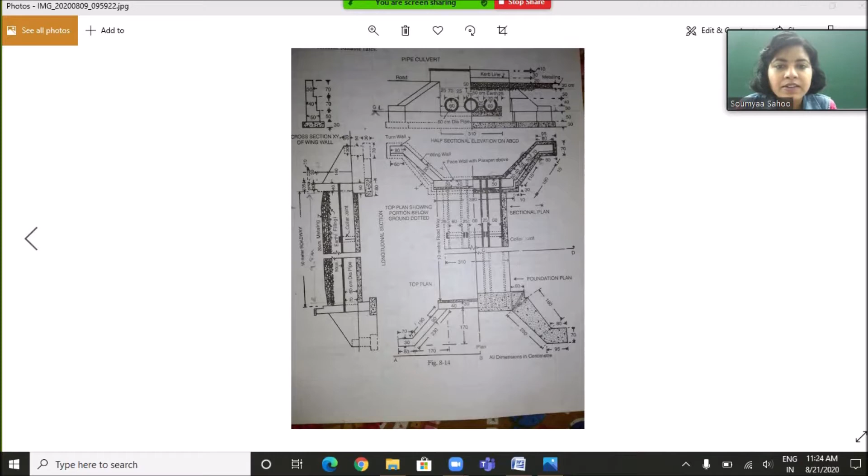So the first item of today's class is first class brickwork. Let's see the plan and the sectional elevation to find out where the brickwork is actually done. The brickwork will be done in the face wall portion, in the wing wall region, in the turn wall region, and of course in the parapet region and over it the coping region. So in these portions you have to do the brickwork.

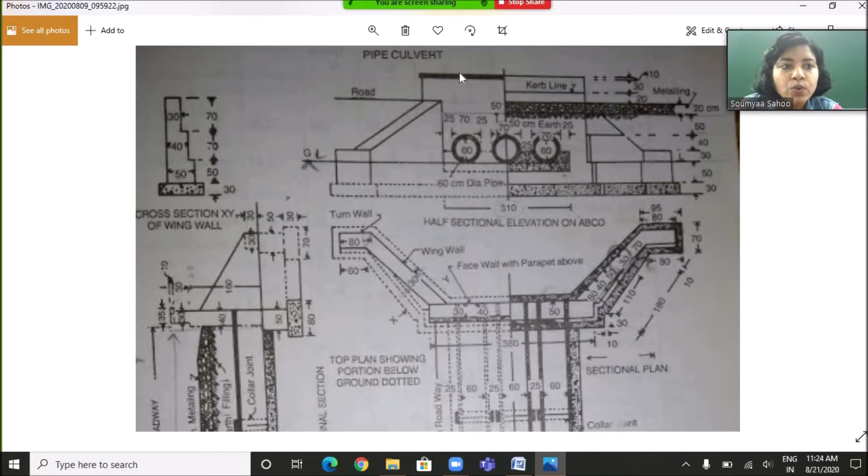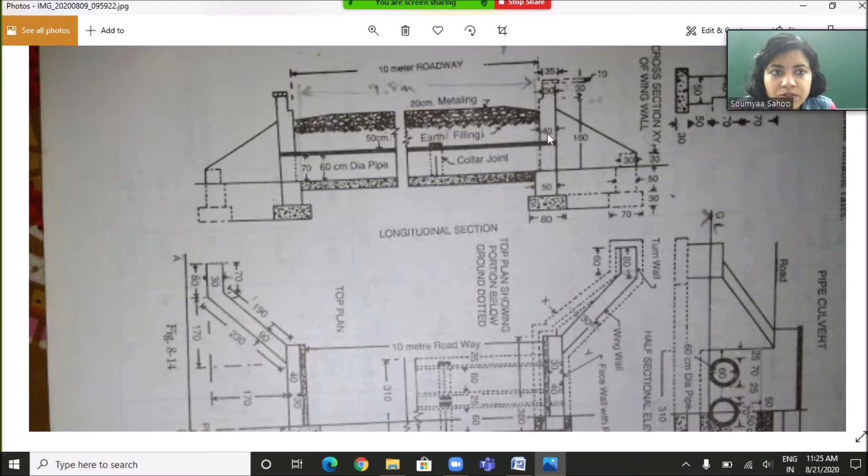If you see the longitudinal section, you can see very clearly that there is a footing of 50 centimeter width below the face wall. Here the brickwork is to be done, and over it in the face wall which is having 40 centimeter breadth, brickwork is also to be done. If you see the cross section of the wing wall, it comprises a breadth of 50 centimeter, above which a breadth of 40 centimeter is present, and above that a breadth of 30 centimeter is present.

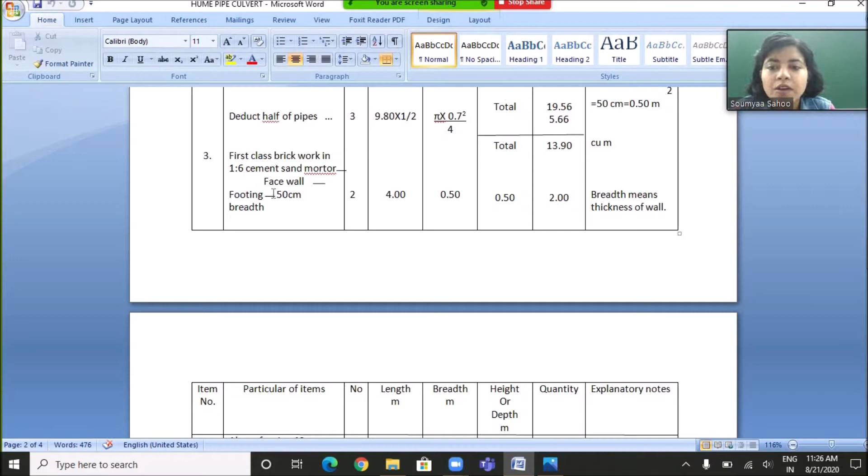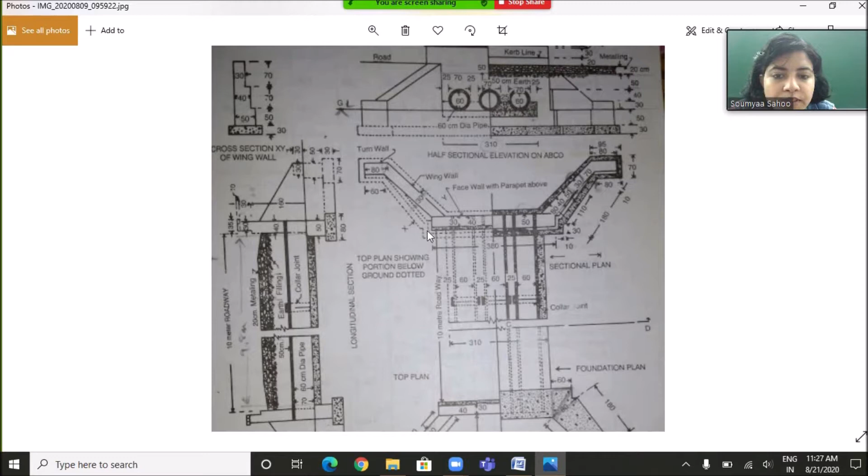In the table, the particulars of items you have to mention is first class brickwork, and first it is to be done in the face wall region where the footing has 50 centimeter breadth. In the plan, from this portion to this portion the breadth is 50 centimeter, and in this footing the brickwork is to be done, with length from this point to this point already given as 3.8 meter, and this dotted gap is 10 centimeter. So 3.8 plus 0.1 plus 0.1 equals the length of the footing having breadth 50 centimeter, which is 4 meter.

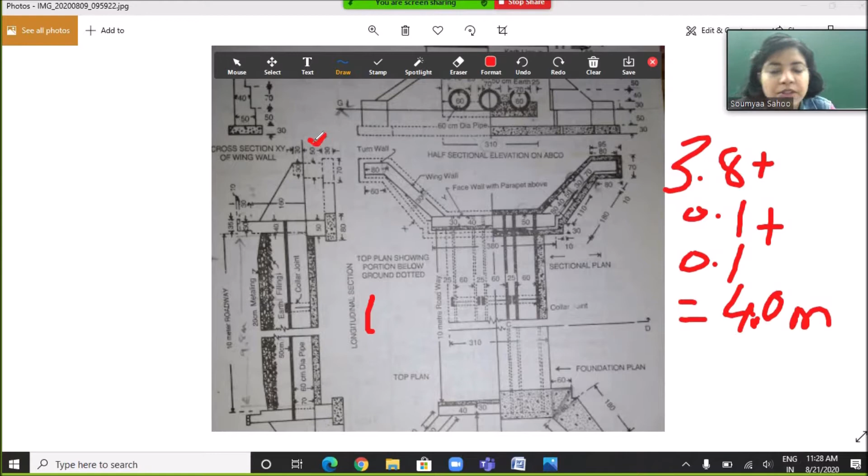Then the breadth is 50 centimeter. What's its height? If you see the longitudinal section, for the 50 centimeter breadth of footing, the height is mentioned as 50 centimeter. So that is exactly how the table is filled. The number of footings is 2 because the number of face walls are 2, and the length we already found to be 4 meter. The breadth is 0.5 meter and the height is 0.5 meter. So if you multiply 2 into 4 into 0.5 into 0.5, you get 2 cubic meter.

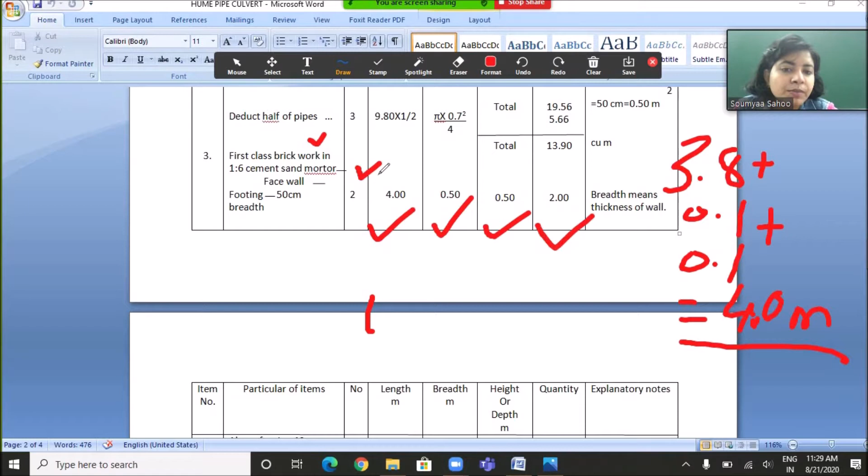So the next brickwork is to be done in the face wall region which has a breadth of 40 centimeter, and this height is 1.6 meter. What is its length? It would be from here to here, which is 3.8 meter, already mentioned in the plan. So the number is filled as 2, length as 3.8 meter, breadth as 0.4 meter, and height as 1.6 meter. The quantity is calculated as 2 into 3.8 into 0.4 into 1.6, which equals 4.86 cubic meter.

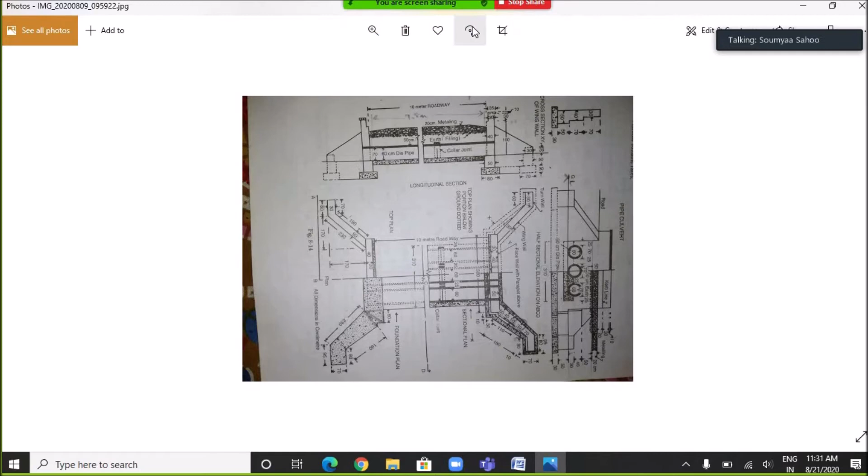Next, the brickwork is to be done in the parapet region. The parapet has a breadth of 30 centimeter and its height is 30 centimeter. Let's find out its length: the 30 centimeter breadth is from here to here, and its length would be from this point to this point, given in the plan as 3.8 meter. So the values are put in the table: number is 2, as there are 2 parapets, length 3.8, width 0.3 and height 0.3 meter, and the quantity is calculated as 2 into 3.8 into 0.3 into 0.3, which equals 0.68 cubic meter.

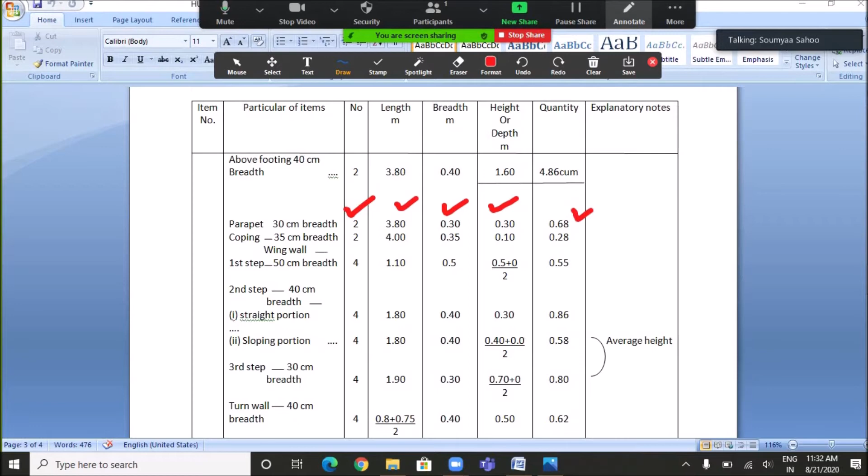Next, the brickwork is done in the coping region. The breadth is given as 35 centimeter and its height as 10 centimeter, as shown in the longitudinal section. The length of coping is from this point to this point, which is 3.8 plus 0.1 plus 0.1, equals 4 meter. So in the table: number as 2, length as 4 meter, width as 0.35 meter, height as 0.1 meter, and the quantity is calculated as 0.28 cubic meter.

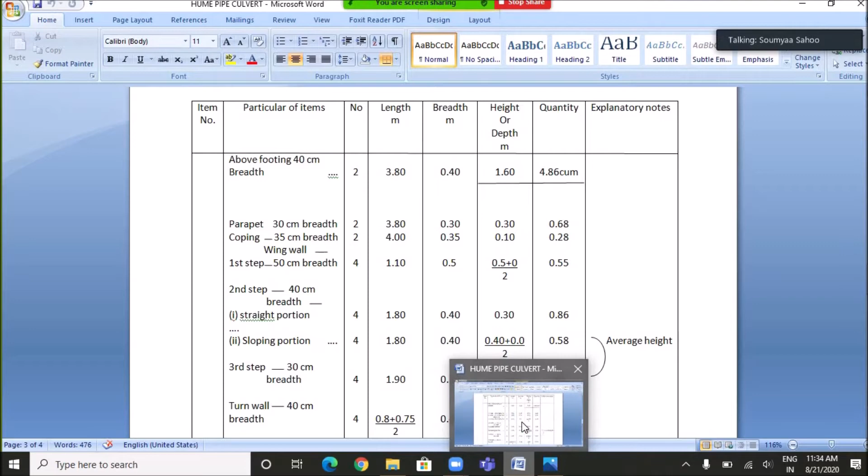Next, the brickwork is done in the wing wall region. If you see the cross section, the wing wall is having 3 portions. The bottommost layer has a breadth of 50 centimeter, above it the breadth is 40 centimeter, and above that the breadth is 30 centimeter. First the brickwork is to be done in the 50 centimeter breadth of wing wall.

In the 50 centimeter breadth of wing wall, which has a length of 1.1 meter shown in the plan, the brickwork is done first. Length is 1.1 meter, breadth is 0.5 meter, and this portion of wing wall is inclined, so we have to take the average height. In the table: number of wing walls having 50 centimeter breadth is 4, length is 1.1 meter, breadth is 0.5 meter, and height is the average, 0.5 plus 0 divided by 2. The quantity calculated is 0.55 cubic meter.

Next portion of wing wall, having a breadth of 40 centimeter, comprises 2 portions: one inclined portion and one straight portion. First, the brickwork for the straight portion, which has a height of 30 centimeter, width 40 centimeter, and length 1.8 meter. Number is 4, length is 1.8 meter, width is 0.4 meter, height is 0.3 meter, and the quantity is calculated as 0.86 cubic meter.

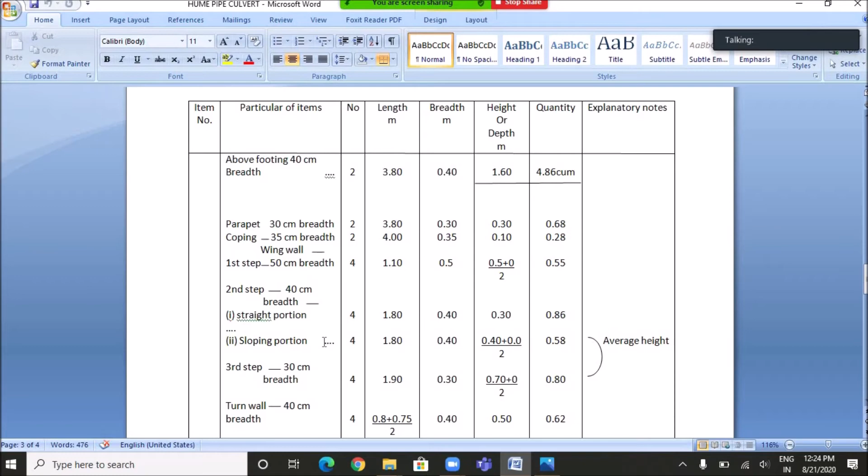Then for the sloping portion, the length would be 1.8 meter, breadth would be 0.4 meter, but since this is a sloping portion, we have to take the average height: 0.4 plus 0 divided by 2. So length is 1.8 meter, breadth is 0.4 meter, average height is taken, and the quantity is calculated as 0.58 cubic meter.

In the third step of wing wall, having a breadth of 30 centimeter, we take the average height since it has an inclined portion: 0.7 plus 0 divided by 2. Its length would be 1.8 plus 0.1 equals 1.9 meter. So length is 1.9 meter, width is 0.3 meter, average height is taken, and the quantity is calculated as 0.8 cubic meter.

Next, the brickwork is done in the turn wall portion. The turn wall has 2 portions: in one portion the breadth is 40 centimeter, and in another portion the breadth is 30 centimeter. Here the breadth is 30 centimeter, and here the breadth is 40 centimeter.

For the 40 centimeter breadth of turn wall, we calculate the average length. This length is given as 80 centimeter, and then we calculate the length from this portion to this portion, which is 75 centimeter. So we take the average length. The breadth is 40 centimeter and the height is 50 centimeter. The average length is written as 0.8 plus 0.75 divided by 2. The breadth is 0.4 and the height is 0.5, and the quantity is calculated as 0.62 cubic meter.

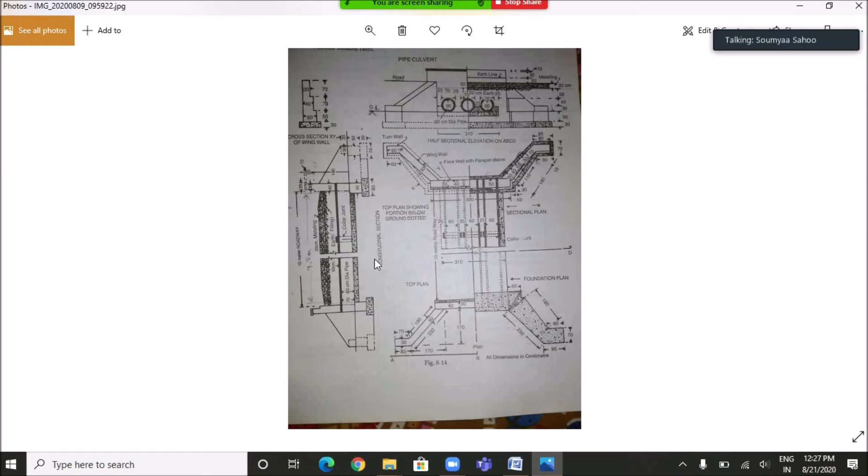For the turn wall having a breadth of 30 centimeter, the average length would be 0.8 plus 0.7 divided by 2, and its height would be 0.3 meter. The table is filled as number 4, average length calculated, breadth 0.3, height 0.3, and the quantity is 0.27 cubic meter.

The total quantity, if we add all the quantities of first class brickwork, would be 11.49 cubic meter. Then next we shall discuss about the cement pointing work.

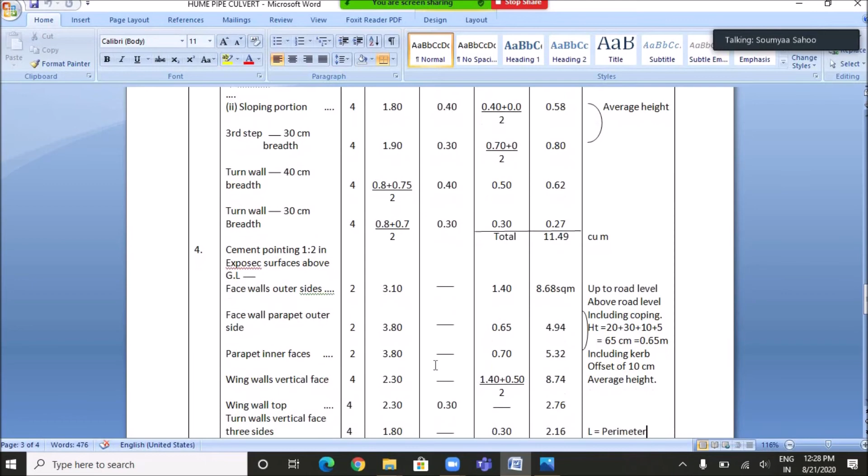First, the pointing work is done at the face walls of outer sides. There are two number of face walls, and the outer side length is 3.1 meter. We have to find its height, from this point up to this point, which is 160 minus 20 centimeter, equals 140 centimeter or 1.4 meter. The quantity is calculated as 2 into 3.1 into 1.4, which is equal to 8.68 square meter.

Then the pointing work is done in the face wall parapet outer side. The length on the outer side would be 3.8 meter, whereas the height would be 20 plus 30 plus 10, along with the projection of the coping, which is 5 centimeter. As you can see, the breadth is 35 centimeter and here the breadth is 30 centimeter, so the projection is 5 centimeter. So 20 plus 30 plus 10 plus 5 equals 65 centimeter or 0.65 meter, and the quantity is calculated as 4.94 square meter.

Then parapet inner face. There are two number of parapets, the length would be 3.8 meter, and the height of parapet from inner side is 70 centimeter or 0.7 meter. So the quantity is calculated as 2 into 3.8 into 0.7, which is equals to 5.32 square meter.

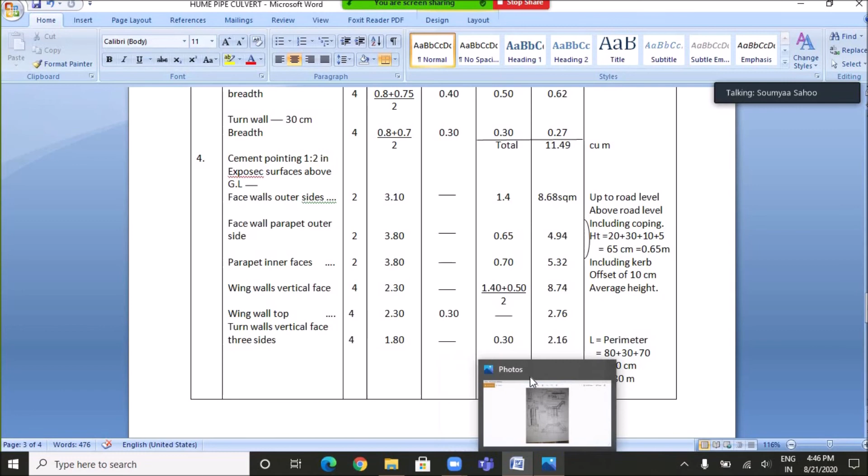Then the cement pointing work is done on the top of wing wall. There are 4 number of wing walls, length is 2.3 on the vertical face, and the top width, if you see the cross section, is 30 centimeter, so we take the top width as 0.3 meter. The quantity is calculated as 2.76 square meter.

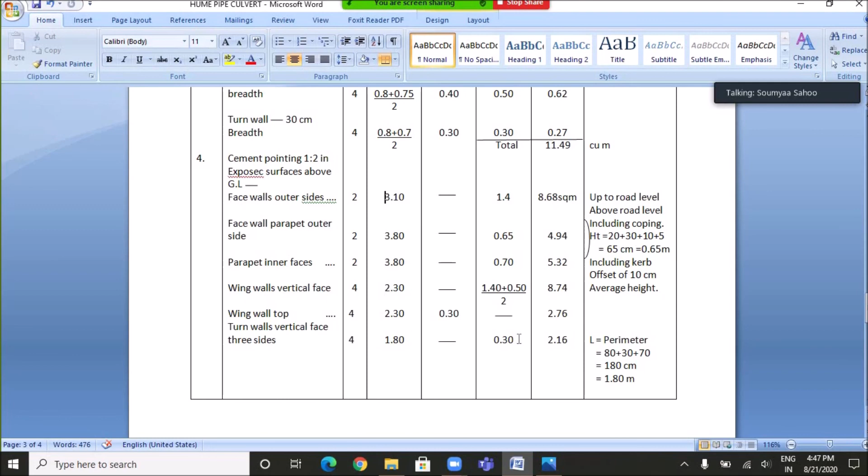Then next, the cement pointing work is done in the turn wall vertical face. In the turn wall vertical face, the length is 70 plus 30 plus 80, which equals 180 centimeter - we have to take the entire perimeter - and the height for the breadth of 30 centimeter of turn wall is 30 centimeter. So number is 4, length is 1.8 and height is 0.3, so the quantity would be 2.16 square meter.

For the cement pointing work on the top of turn wall, we have to take the average length: 0.8 plus 0.7 divided by 2, and the breadth is 0.3 meter. The quantity is calculated as 0.9 square meter, and the total quantity is 33.5 square meter.

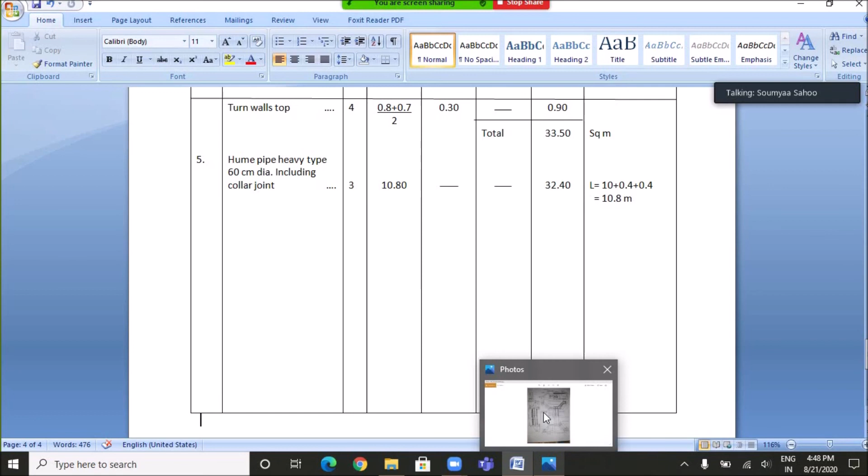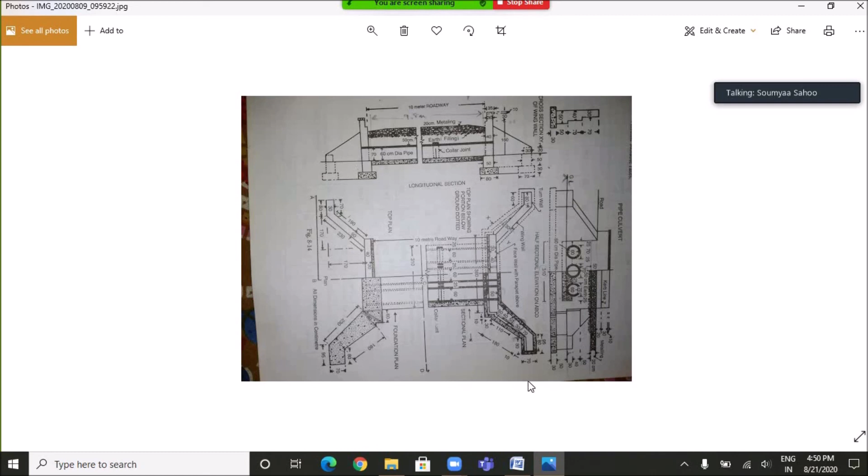Then next, the last work is the fixation of Hume pipe. 3 number of pipes are provided, 1, 2 and 3, and the length of the pipe, from this point to this point, is 10 meter, but some portion of pipe is also embedded within the face wall so that it can be held tightly. This portion is 40 centimeter, so the pipe is embedded from this point to this point: 10 meter plus 0.4 plus 0.4, which equals 10.8 meter.

And the total quantity of the Hume pipe is 32.4 meter. So with this we have finished the detailed estimate of Hume pipe culvert.